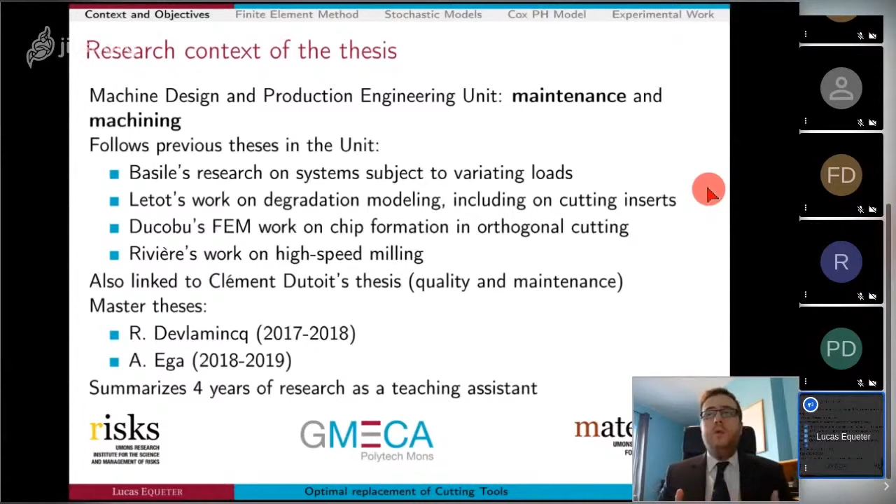We'll come back to that later, but obviously for most of you, the question probably is, why would we even care about cutting tools? Well, the difference between this and this is indeed the wear of cutting tools. We can clearly see here the difference in quality between this surface and the surface obtained with a worn tool.

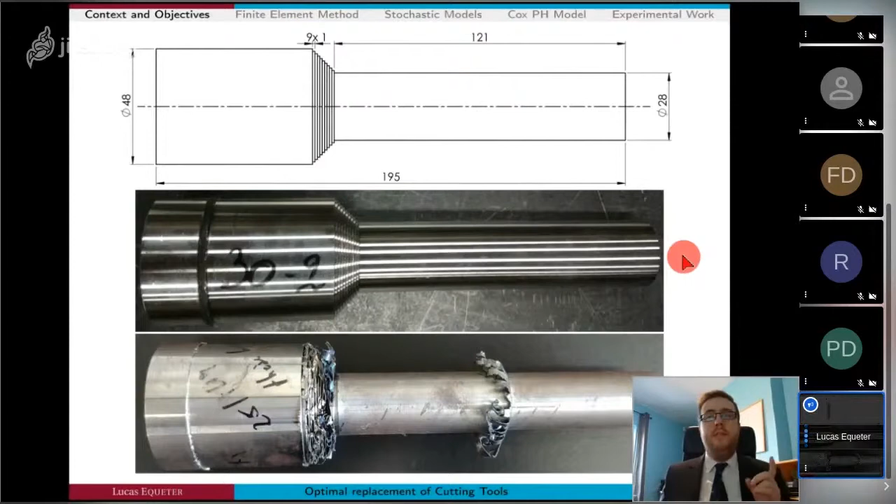Likewise, the shoulder quality here is clearly unacceptable regardless of the tolerances. I machined over 200 of these bars over the last summer in order to gather the experimental data necessary for this thesis. In the process of that machining, I wore 30 tools.

What you see here is a worn cutting insert. The flank wear, which is the main phenomenon in cutting in single point turning tools when the cutting parameters are within acceptable range, is measured vertically here, and the average value of the length of this worn face is usually denoted VB. This length here is roughly 1 millimeter, and this length is roughly 1/3 of a millimeter.

Given this context, the interest for mechanical production industries is clear. The objective is to control the evolution of tool wear in order to be able to replace a tool before producing poor quality. Currently, we're obviously not letting tools go this bad, so let's have a look at the criteria that are used for tool replacement.

In order to know whether it's time to replace a cutting insert or whether we can keep it on the machine tool, the common methodologies are firstly based on the worker's experience. When interviewing machining operators, the answer is often something along the lines of, 'I heard it was time to replace the insert.' It seems that indeed there is a change of tone in the machine noise when the tool reaches its end of life.

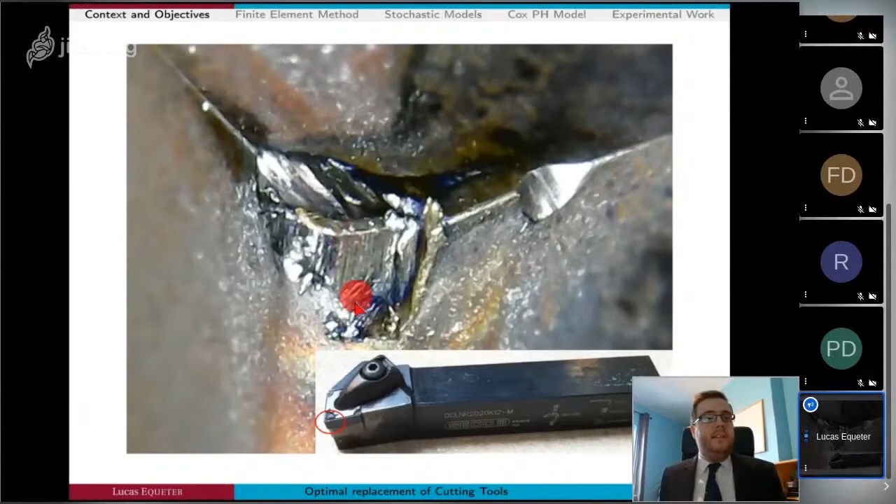Finally, there is some tool condition monitoring that is already sometimes implemented. The procedure is then simple condition-based maintenance. The drift in the retained variables is observed until a threshold, and that will induce the tool replacement. And then there is also a standard which recommends a value in the case of life testing, 0.3 millimeters in VB. As I explained, VB is this vertical measurement of the flank wear.

So we have 4 options here. The first is empirical and hard to quantify. The second has clear flaws because it does not allow us to monitor the specific evolution of tools, and it is based on an average behavior.

The third is interesting, but you're just waiting for a value to cross a threshold, and there is no estimate of the tool's remaining useful life until this threshold is crossed. So now the last option can be included in that family because we are monitoring the condition of the tool.

But it's also quite complex to use because you obviously need to stop the machining in order to be able to measure this value. But it's a quantifiable value, we can measure it, and that's one of the major benefits of this criterion. Now, the value of this criterion says absolutely nothing about the quality of the workpiece machined with that tool.

Are we assured to produce within tolerances? No idea, but it's measurable and it's standardized. So let's work with that for the moment.

So we have a variety of criteria, and the research question that comes from this is, are we able to determine the remaining useful life? In other words, considering the next planned machining operations, considering the specification that must be met on the workpiece we are working on, considering the admissible VB value, considering the current state of the tool, how much time can the tool continue producing?

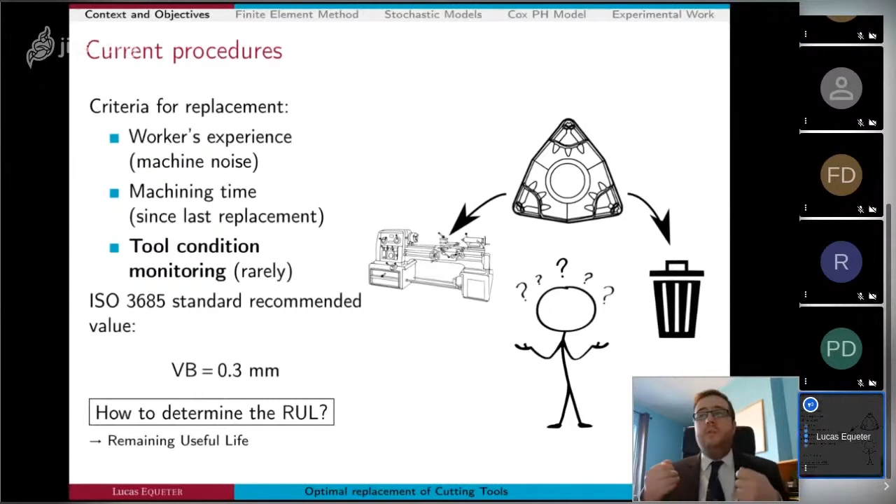In order to answer this question, we have developed three approaches. The physics of failure, where we represent the degradation of the cutting tool. The condition monitoring, where we monitor a series of variables—forces, electrical power consumption, tool wear, etc.—in order to determine clearly, directly or indirectly, whether the tool has reached the end of its life. And then there is the statistical degradation modeling, where based on statistics, we assess the average life of a tool.

A first approach consists in the modeling of the cutting process. Simply said, it is the numerical modeling, the numerical simulation, of the cutting process. In this model, we will introduce progressively wear on the cutting tool. The objective of this approach is to determine a link between the evolution of the tool wear and some condition monitoring variables that we could measure experimentally. So we are at the junction between both of those approaches.

So let's talk a bit about this model. It is a finite element model in which we discretize the model into elements on which we calculate the value of quantities of interest—they may be temperature, stresses, etc. It represents orthogonal cutting, which means that the material velocity is supposed to be perpendicular to the tool edge, so the velocity is horizontal on this figure. The model is in the CEL formalism with a Lagrangian tool, which means that the mesh of the tool is linked to the material.

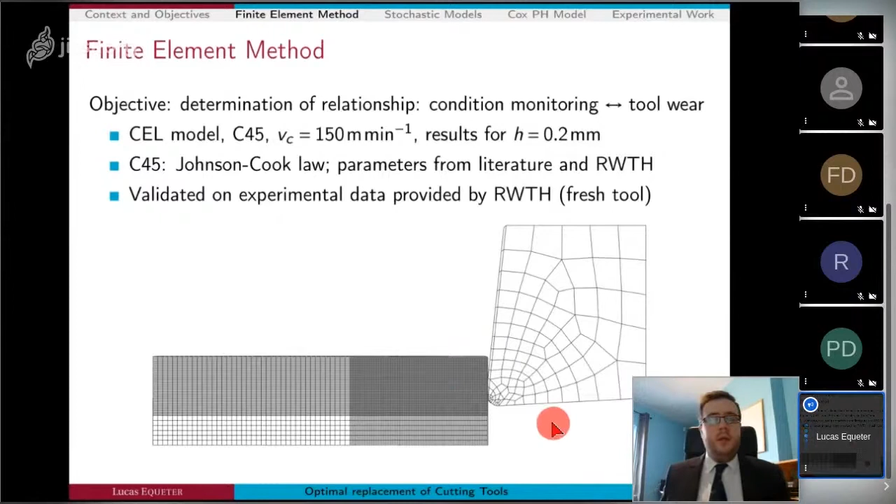In this figure, I only represented the part of the mesh where the material is at the beginning of the simulation, but there is plenty of mesh to allow the material to move and form the chip and the machined surface. Then, taking into account the tool wear, a temperature plot allows seeing the influence of the tool wear and ensures the tool wear indeed has an influence on the model.

It's probably difficult to see on your screen depending on the video stream, but this here is the fresh tool without tool wear, and we progressively add wear on this lower face, as I explained. It's easier to see here on the final stage, where we have a longer area of contact between the tool and the surface, where most of the heat is generated. So there's clearly heat generation along the flank wear land, which validates an influence of the tool wear.

There's always room for improvement, of course, and for example, one could add crater wear to the model. But the objective at this stage is to produce qualitative results, so it's already quite interesting.

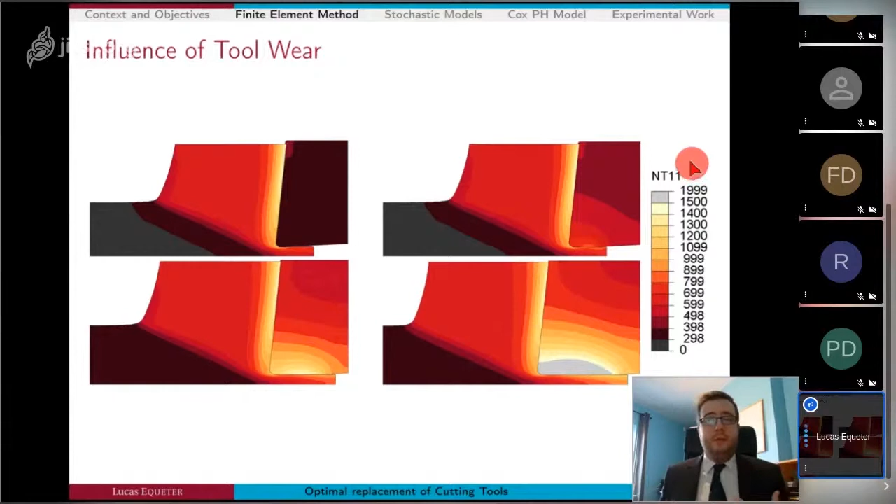I also use these views to define forces. We name cutting force the force resulting from the cut along the horizontal axis, so the force measured on the tool along the horizontal axis. And we name feed force the perpendicular component, so the vertical component.

Precisely, this model allows highlighting the evolution of force components, feed force and cutting force, with the tool wear. In these graphs, along the x-axis we have the evolution of the tool wear from 0 to 0.3 millimeters, and along the y-axis, the evolution of force components, and the ratio between the feed force and the cutting force on this graph. In this case, quadratic, linear and exponential regressions are all excellent for the feed and cutting forces, but also for the ratio between these quantities.

These results bring forward the importance of forces as a wear indicator. As we will see later with the experimental work, this is confirmed indeed.

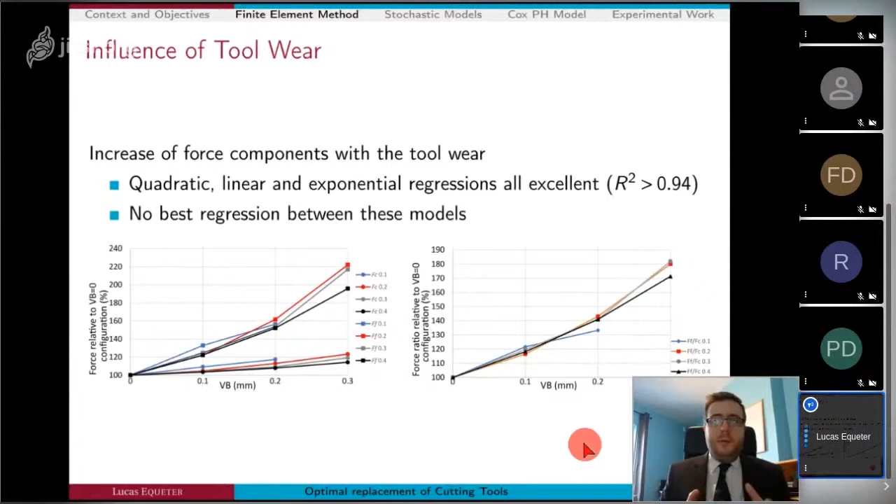So let's go back to our triangle of approach. We already showed how we can link some condition monitoring, that are the cutting forces, with the tool wear. Now let's have a look at a way to use successive observation of the tool wear as condition monitoring in order to infer the statistical residual lifetime for the cutting insert.

This is the stochastic approach. In other words, we are going to take pictures of the tool and evaluate the wear at the time and deduce the time during which we can still machine with this tool. So the principle is easily stated: we simulate positive increments of degradation, and the failure time corresponds to the crossing of the wear threshold.

In this example, we inspect the current state of the tool at 5 minutes here. We then generate numerically degradation paths, represented in blue, that lead to an estimation of the remaining useful life. Shortly before that planned end of life, we inspect the tool again, and observe that it is not quite worn yet. So we generate a new set of curves in red and the corresponding RUL estimate.

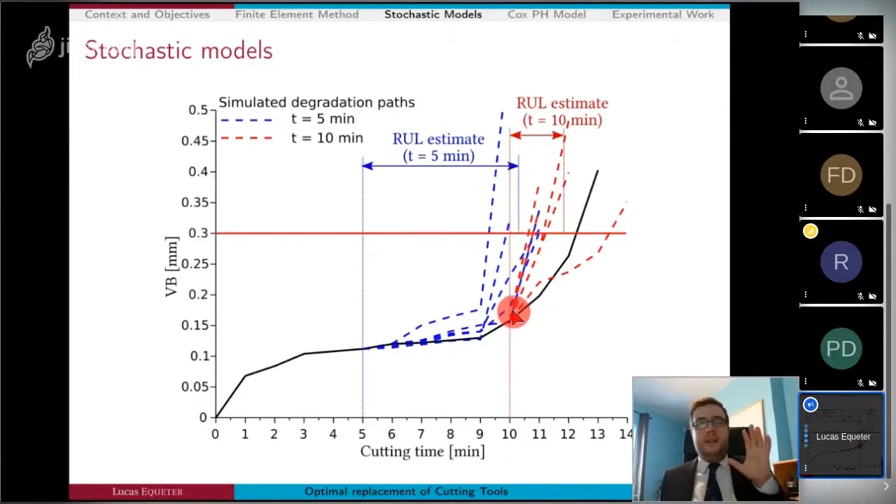So obviously, the question is, how do we generate those curves? It is based on a gamma process. Basically, the degradation corresponds to the initial degradation, that is the degradation observed at the initial time, plus an increment that follows a gamma distribution.

This gamma distribution depends on two parameters. Regarding these parameters, two models were developed in the framework of the thesis. They differ on the shape function m of t.

First, a nonlinear model was proposed using the inflection point in the experimental degradation evolution in its parameters. It is based on a graphical standpoint.

A second possibility is the use of a piecewise linear process. With this process, we divide the time interval into slices, which I divided here vertically, in order to fit for each of these time slices a linear shape function for the gamma process. The parameters are obtained by the maximum likelihood method.

The only issue with this method is a lack of data on the last time intervals. Indeed, if we take this last time interval as separate time intervals as we did before, we are progressively losing curves because the tools have reached the end of their lives before we start this interval. So we are missing data.

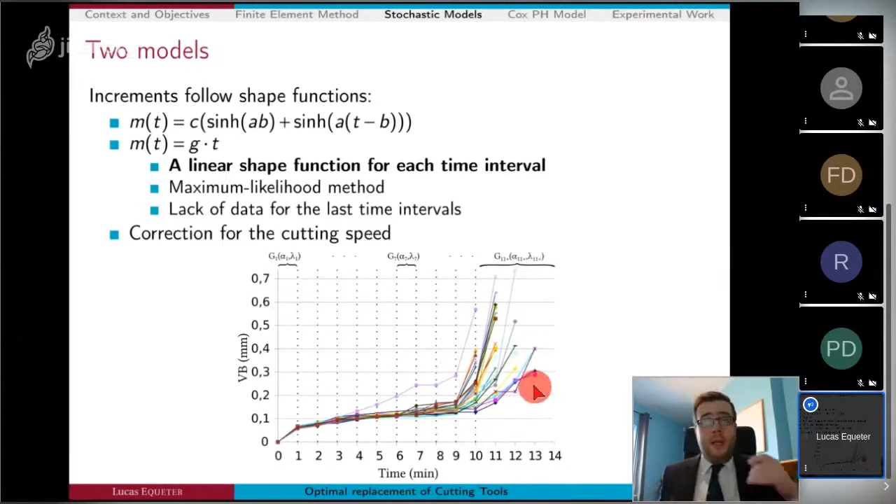Additionally, for both models, we can correct for the cutting speed, so we can correct the evolution prediction regarding the cutting parameters. In order to put all of this into practice, I created an algorithm that I present here to you neatly, but be aware that behind these simple steps, there are 800 lines of Python code hiding.

The principle is, in the learning phase, to fit a linear gamma process for each time interval. Then we produce degradation trajectories, as I explained, and we deduce the estimated failure time and statistics, and from that we estimate the RUL, the remaining useful life. Depending on the RUL value, we then either replace the tool or plan a new inspection after further machining.

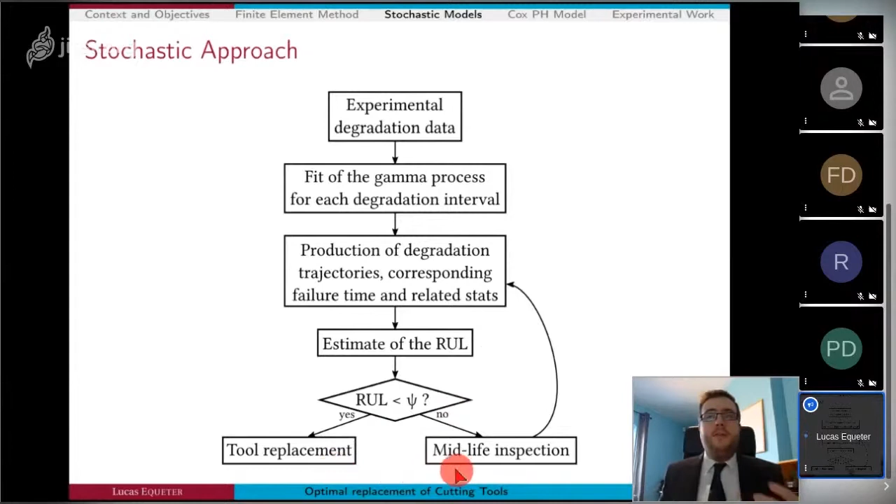This method is indeed able to produce an RUL estimate on the basis of few wear observations. Obviously, these observations necessitate the stoppage of the machine and some time for the wear measurement, but we already have something. It also needs several tool observations, and more precisely, we showed an important influence of the tool inspection time. All in all, we produce RUL estimates that are roughly 13% below the experimental observed values, but we also showed how this could be used for cost-based optimization.

We certainly could also consider an automated image analysis or the use of nonlinear shape functions that would allow producing more complex shape functions for the tool wear evolution.

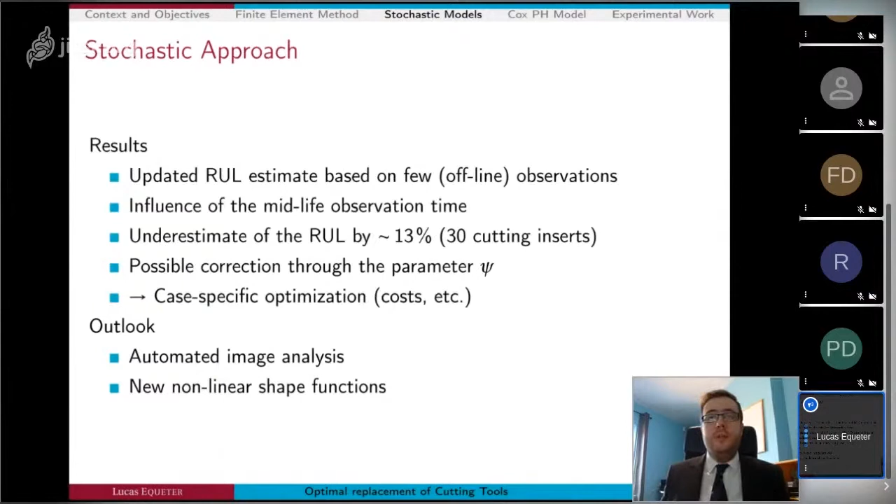And we are back to our triangle. So we just showed how we can link some condition monitoring, that is the tool wear at time t, with the tool end of life through a statistical process.

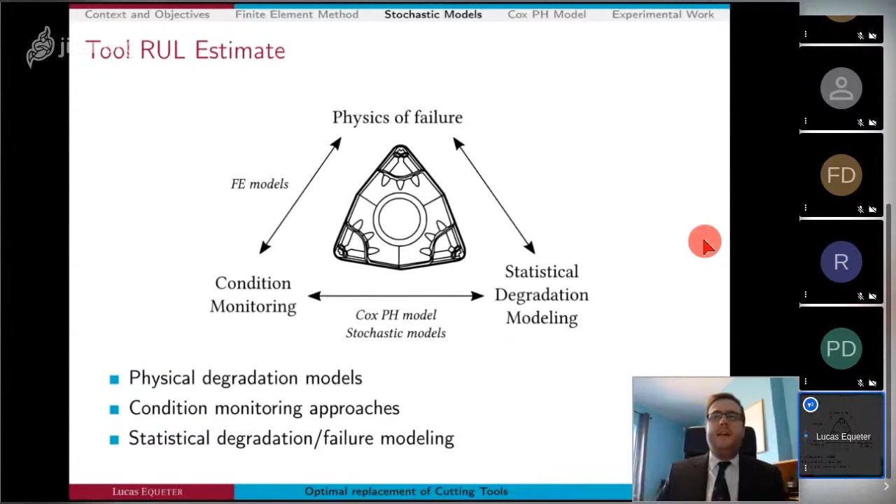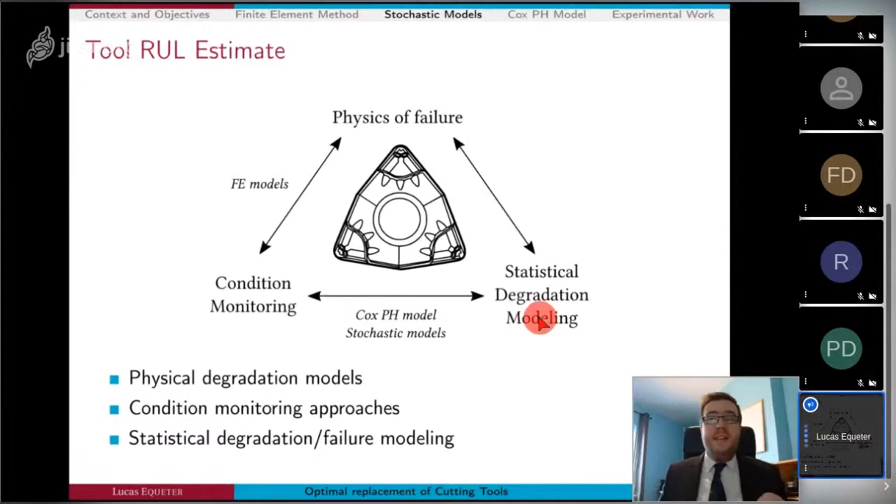Now let's have a look at another possibility for estimating the tool remaining useful life from condition monitoring as well, which allows more choice in condition monitoring variables, since it could possibly take into account any variable related to the tool failure rate. This is the Cox-PH model.

I made you once again a nice algorithm that mostly works like the previous one, so I'm not going to detail it step by step again. Rather, I will point to this loop here. It means that we are able to use the failure data from a previous failure and add it into the model. This means that with the progression of machining, we are actually able to continue training the model over time as tools fail. This was not allowed by the previous model, which necessitated experimental observations of the tool.

A last element before we continue: it may seem anecdotal, but it is not. The Cox-PH model is also able to take into account the fact that the tool was replaced before it actually failed. This is important because it's valuable information, and it allows continuing to improve the model even though we are replacing on the safe side of the failure.

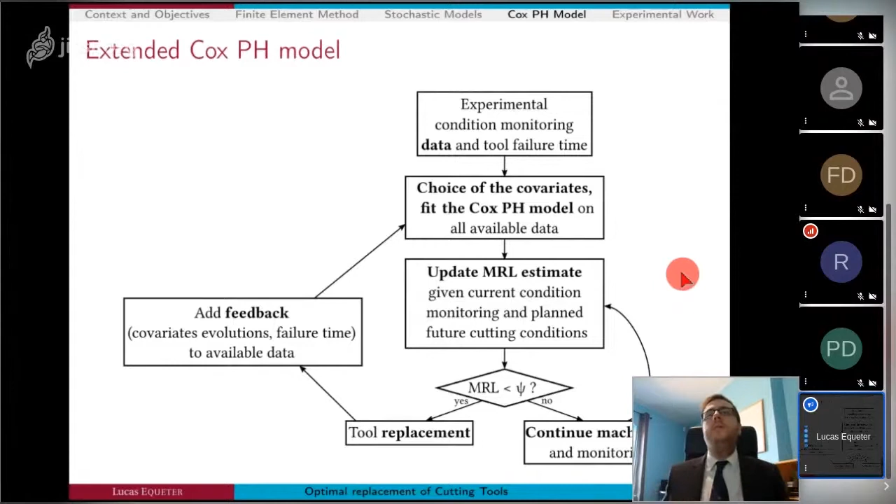Most of the time, their function is a linear combination of the covariates. In fitting a PH model, it is obvious why covariates must not be a linear combination of one another, as the weighing coefficient of collinear covariates would then be undetermined.

On the nature of the covariates, they correspond to basically any variable that is related to the hazard rate. They may represent parameters that are constant during the tool life, such as cutting parameters during tool life testing, for example.

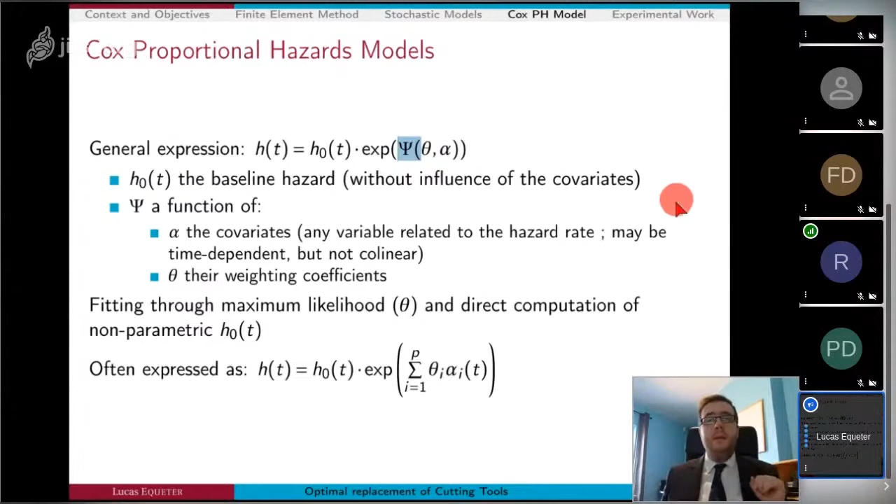They may also be time-dependent and be able to take into account all kinds of time-varying variables, especially condition monitoring variables. This is the extended Cox-PH model. It has its complexities, but we will come back to it in a while. I will start with the gentle traditional Cox-PH model, the time-independent model.

In general, the output of the PH model is a hazard rate h of t, which is used to determine the lifetime of the tool. The reliability of the tool is computed from the hazard rate, and the idea is then to obtain the mean uptime of the tool, its mean average, from integrating again the reliability.

The first question that comes to mind is whether a data transformation or normalization should be necessary. The normalization is not necessary as it would be compensated by the weighting coefficients, but we may use it if we try to identify the relative importance of each covariate.

The transformation, however, has been questioned extensively, and I produced analytical developments in the thesis that were just published a few days ago, showing why a transformation may be necessary, in which cases, and how to determine which transformation to use.

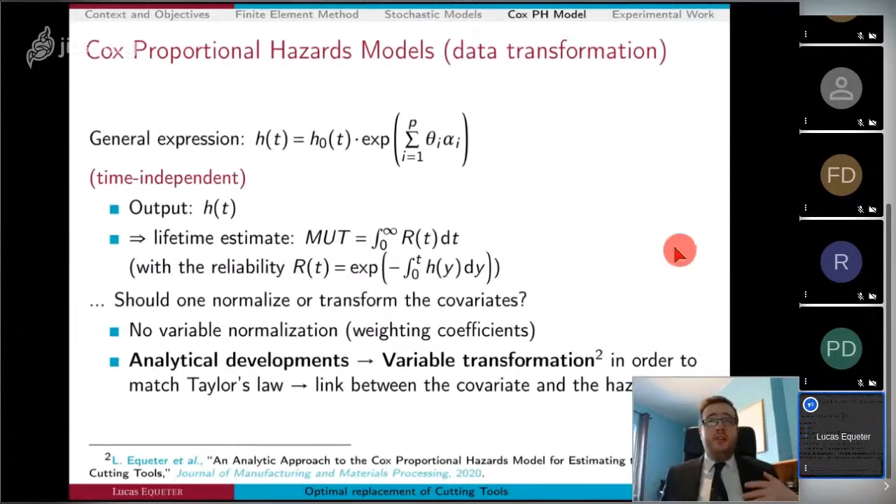What's interesting is that for some of the possible condition monitoring variables, the analytic information necessary to determine the best data transformation can be obtained through the finite element method I presented earlier. This is why it's important to get a link between the tool wear and the condition monitoring variables. The interest of this transformation is shown in these figures.

There is a law, Taylor's law, given here, that links the tool life t with the cutting speed Vc. What's interesting with that law is that when we keep the same tool, we are able to determine the parameters Ct and n, and it allows predicting the tool life t for basically any cutting speed.

We can use the Cox-PH model to determine these parameters. With the data transformation, we have a significant gain in accuracy of these parameters determination. So here we have the accuracy of the parameters estimate, and here Ct, with 1 corresponding to 100%, the exact value. And this is a function of the learning sample size.

We show that the log transformation that we proposed for the data in this case allows an improvement in the estimate of the Taylor's law parameters, hence a better tool life prediction.

Now, on the front of the extended PH model, which has never been used, to the best of my knowledge, in the case of cutting tools, it is well adapted to condition monitoring variables, which may be considered as covariates for this model. It is, however, much more complex because it necessitates an estimation of the covariates after the current time.

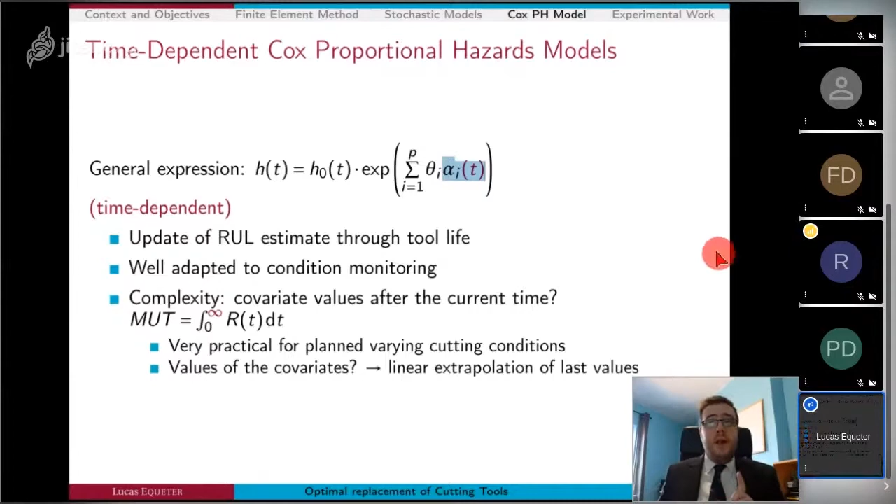As I explained in my introduction, I machined 200 bars for experimental work over the last summer. In order to wear out 30 tools, it was necessary to do this at various cutting speeds. You have here the cutting speeds for each insert number.

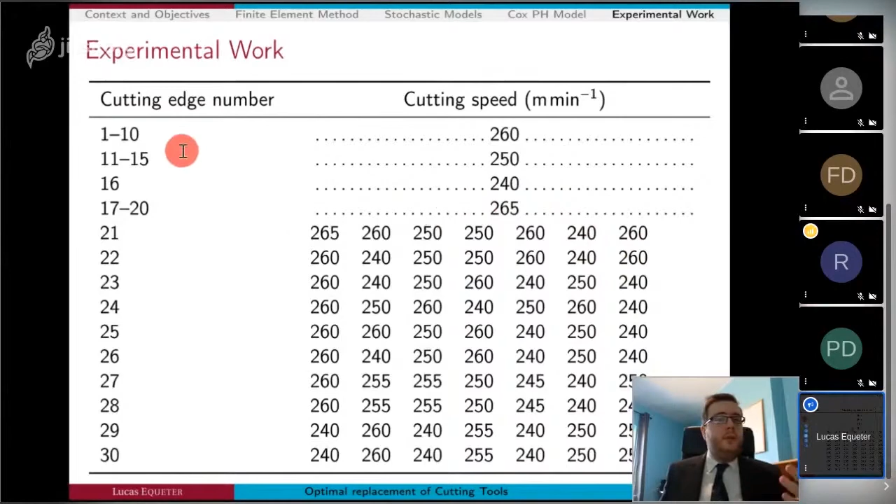I did this even with varying cutting speeds, as you can see here. For each tool that I wore out, the cutting parameters have been different, except of course for the few first batches. Remember, time-dependent Cox model with varying parameters for tools go quite well together, as I explained earlier.

In addition, I measured a series of parameters: wear evolution, obviously, cutting forces, electrical currents, workpiece roughness - we will come back to that a bit later - and chip samples.

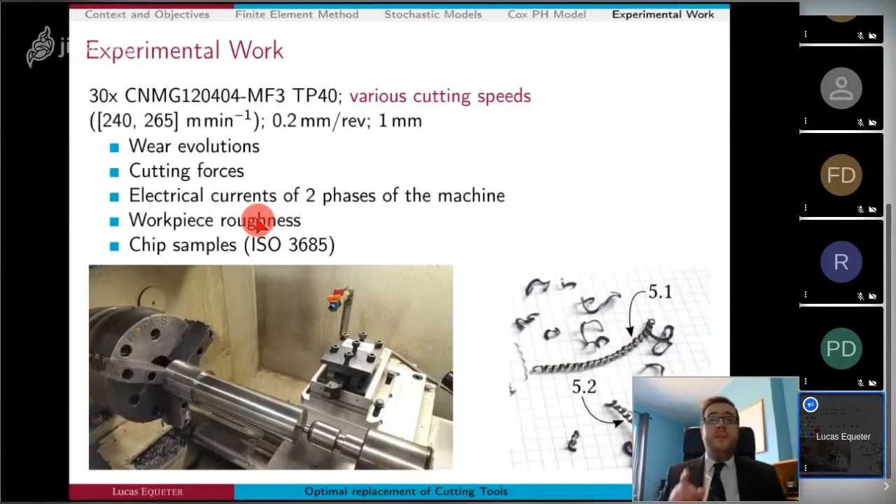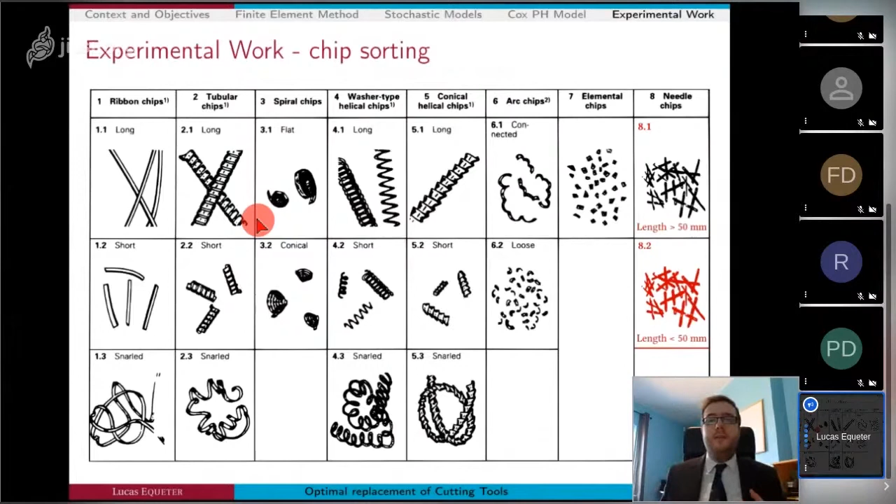I even sorted the collected chip samples according to a classification of the standard, adding chip subcategories because it was actually missing. In the end, I also showed that the chip type evolved with the tool wear, with specific chip types appearing close to the end of the tool life.

All right, now that you know what data I'm working on, let's go back to the Cox-PH model. The major difficulty, as I said, is the covariate selection. So we are working with covariates that are time-dependent, and we know little about their evolution.

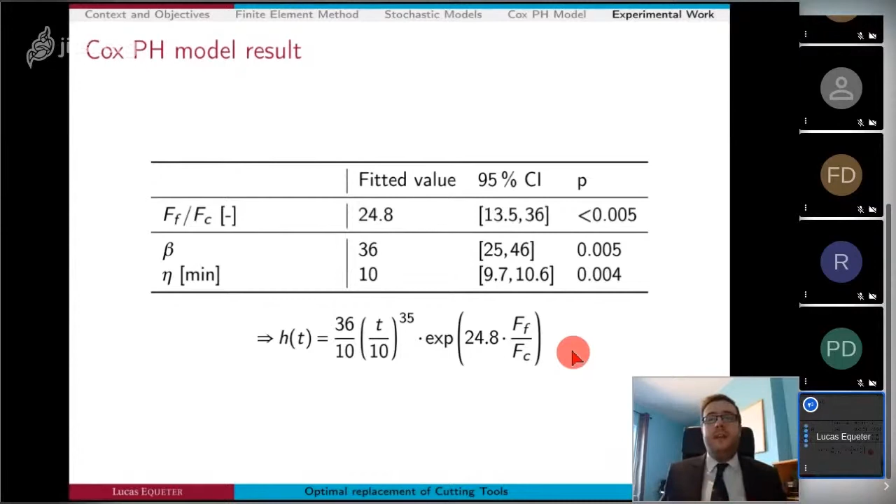I covered in depth the quantification of the results of this approach in the text, but obviously these results are a bit less visual. But they have as a major advantage to take into account a wide variety of condition monitoring variables. I strongly insist on the importance of keeping variables - we must keep only variables that physically make sense, because with a data set large enough, it's extremely easy to develop models that appear to fit extremely well, but bear no physical sense with the physical nature of the failure.

Here we have tangible effect and physical information we may rely on. In the end, we certainly ended up using only the force ratio as a covariate, with results that are comparable in quality to the stochastic approach, but without machining interruption. We can measure the forces online, whereas we only can measure the tool wear by interrupting the machining in order to measure directly on the tool. Obviously, the choice of covariates is a bit complex, but we also benefit from the possibility of continuing the model improvement over time, whereas the stochastic approach needs additional experimental work with wear observation.

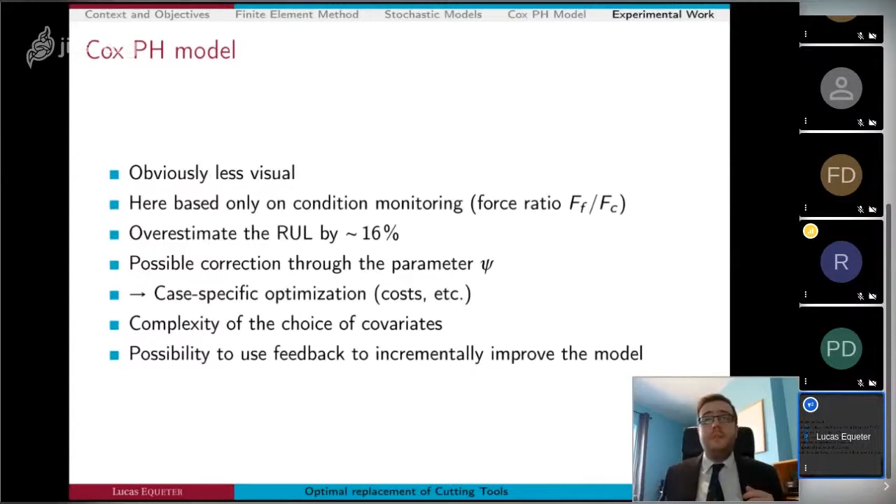You should focus first on the quality of your production. My answer, but your opinion may diverge, is that a tool is worn when it is no longer able to machine within the tolerances, within a certain probability. With a fresh tool, of course, it's certain that the production requirements will be met, but over time, the probability will grow that the machining will be out of tolerances.

So there is the variability of the tool and the material, and thus the scattering of the time or the criterion value at which the tool must be replaced. In the end, there is always going to be scrap, but you need to set a percentage of scrap that is acceptable by taking into account the cost of a tool replacement and the cost of scrap.

Only then should one look for relevant sensors and try to equip the machine. One must keep in touch with the quality criteria for the workpieces if possible, in order to maximize the correlation between the measured variables and the key indicators. This will lead to quality prediction. Then, depending on the observed covariates, choose one of the methodologies that I proposed and apply it to the data. I personally recommend working with the PH model because it's able to continue learning past the first few workpieces.

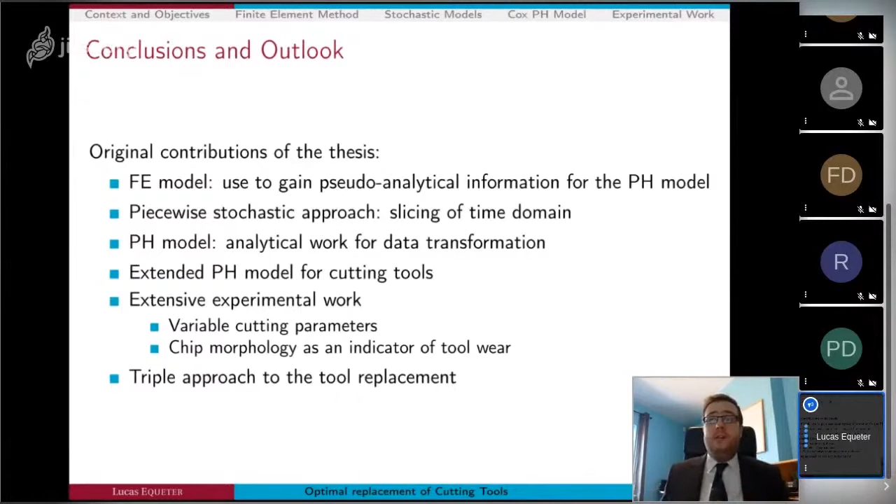I will now conclude by stating again that the thesis is based on a trio of approaches with the use of a finite element model in order to gain, among others, pseudo-analytical information. This information can be used with the original analytical developments that I produced in order to determine the right data transformation to go with the PH model. I also worked on the extended PH model, and all this was applied to experimental data that I gathered through last summer.

A quick outlook now to the possibilities of improvement, and I will keep it brief. I'll just mention the possibilities regarding crater wear in finite element model, other possible shape functions for the stochastic approach. Obviously, there are numerous questions concerning the replacement criteria for cutting tools in industrial practice and the link to the workpiece quality. All in all, this work may be a part of an integrative solution for tool RUL prediction in industrial environments, especially given the tremendous amount of data that will become available in the framework of Industry 4.0.

Now, I will just take a short moment to summarize the 4.5 years that just went by, because I don't want this conclusion to stay just a summary of my work. It is 4 years that brought so much more than figures and scientific results. Of course, I had to set out a statistical artillery that I just explained to you, but I had the tremendous opportunity of meeting industrial contacts and international partners. We are working right now with NG and other partners. I had multiple contacts with Colline, for example. I had also the opportunity of having master students working on subjects related to my thesis, Arnaud Ega and Robin de Vlaminck. I want to thank you guys. You're likely watching. Thank you. I'd like to thank you for your attention.

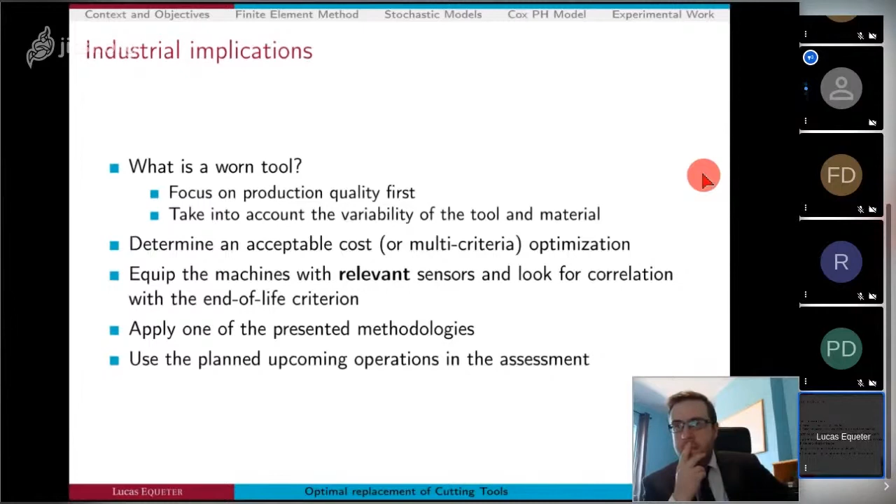Do you think it would be interesting to have a criterion on the human factor? Because you could say, well, if I have a very well trained workforce, it would be different than if I have all novices, or maybe I have some people that are very quality minded and people that are less quality minded. Is that a factor you would consider taking into account, or do you think that's too far fetched?

I think it's complex, of course, because we are giving big concepts, but we are not working on a specific case, so it's complex to answer your question. I would say it's a bit far from the question, because if we are thinking of the worker's experience, for example, for the noise of the machine detection, then it is obviously extremely subjective. So even though people may be trained, it's still complex. If we are thinking of it as a criterion for the replacement of cutting tools, for me it should obviously not be taken into account, because the person operating the machine, especially a CNC machine, would have a relatively low influence on the tool failure time, in my opinion.

Okay, thank you. Thank you. Okay, thank you. Next, Professor Atanasio, do you have any additional question? No, I don't have additional question.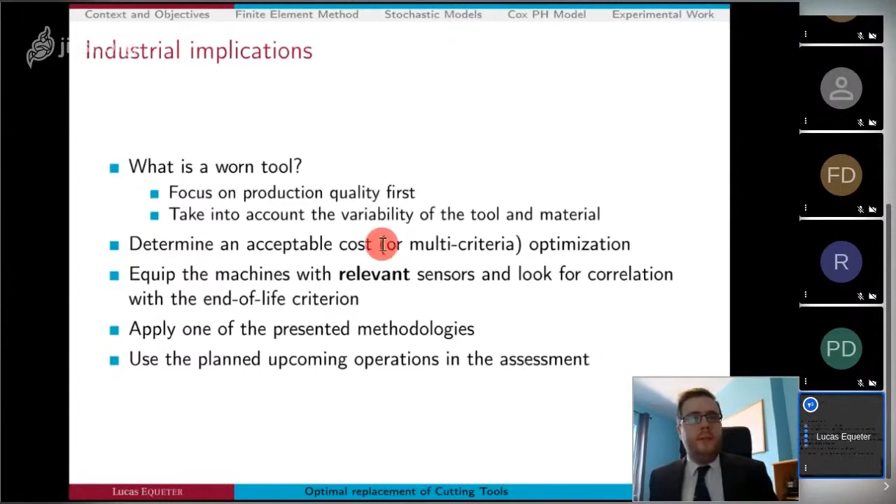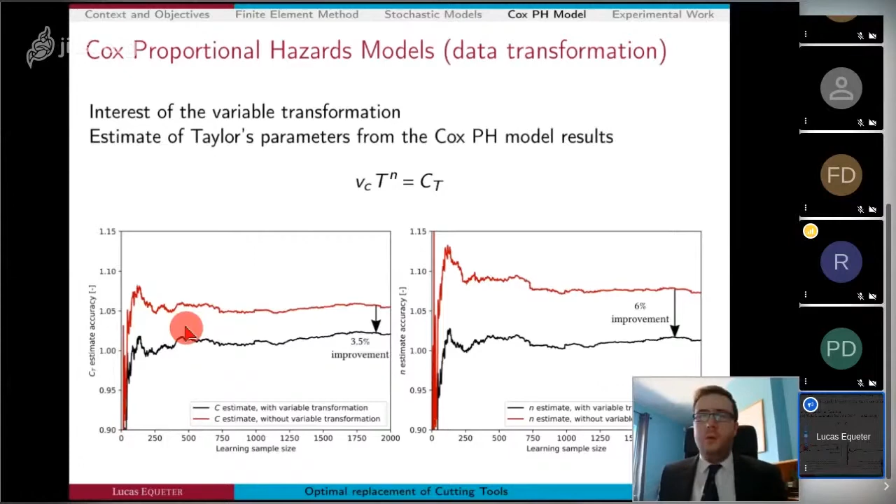Okay, so we worked on that, and one first element of response to your question is shown in this slide, where we can assess the convergence of the Cox-PH model. In this case, it is working simply on the cutting speed parameters, but I showed in one of my contributions that with something like 25 to 30 points of data, we already have something that allows the Cox-PH model to run within 5% of its converging value.

So we already have some answer to this question, and this was used in particular in the decision of the number of inserts that would be worn in the experimental work. It was part of the process in taking this decision.

So basically, you would need to wear out maybe 30 inserts experimentally before you are able to start using the PH model. I'm speaking here only about the PH model industrially. But what's interesting is that you can teach the model while continuing your production.

So you just continue producing as usual, and through the process I explained earlier, you start by teaching your model separately. You are not taking the output of the model first, but taking either the logbooks I was talking about earlier with Professor Pintelon, or taking the data as it comes, and after 30 inserts were worn, you start to have results from the Cox-PH model, and you update your prediction with time. That's very interesting.

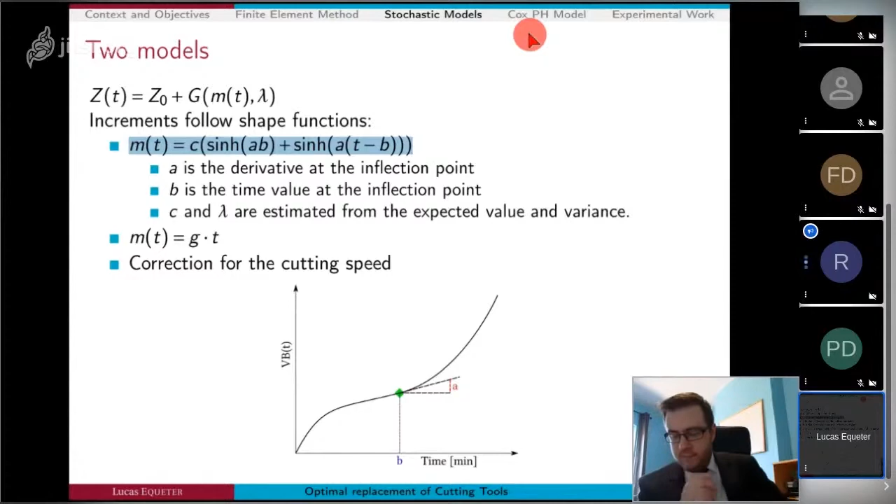Okay, and the other remark is about the overall approach. In the data, we have only one data, which is the wear, tool wear. If we imagine that we have a tool with many inserts, what is your recommendation about the application of the approach? Could we use the overall approach at the same time, on the same topic?

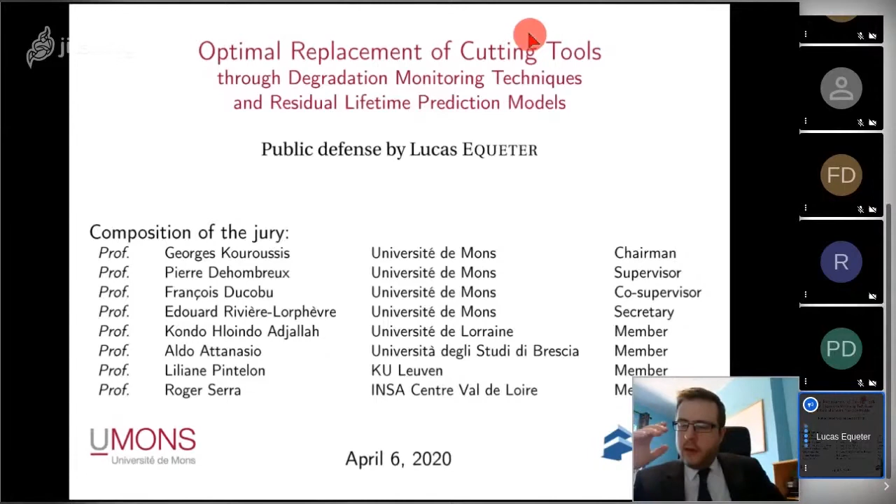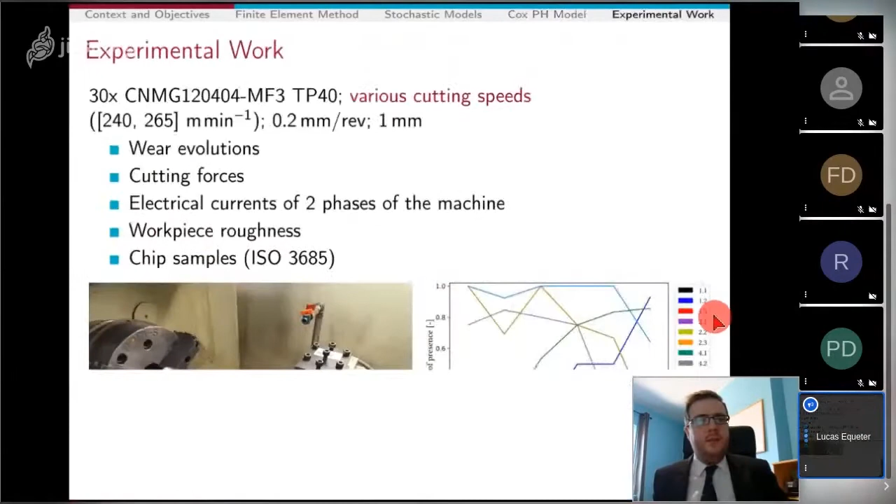Are you speaking specifically of the stochastic approach, or are you speaking in general? In general. Well, in general, we are not limited to the measurement of the tool wear. Obviously, we took more measurements than that.

But what's interesting, especially with the PH model, is that you do not have to base your replacement decision, or the tool end of life as you document it in the database, purely from the tool wear. This is interesting because if you decide to replace a tool because it's producing bad quality, then you can specify your tool as being failed in the database. The Cox PH model will take this into account as a failed tool, although maybe it did not reach a wear criterion.

Yes, okay. Okay, now thank you. No more question, no more remark. Thank you very much. Thank you very much.

Congratulations, Lucas! Congratulations! Congratulations! Congratulations! Merci beaucoup, merci.